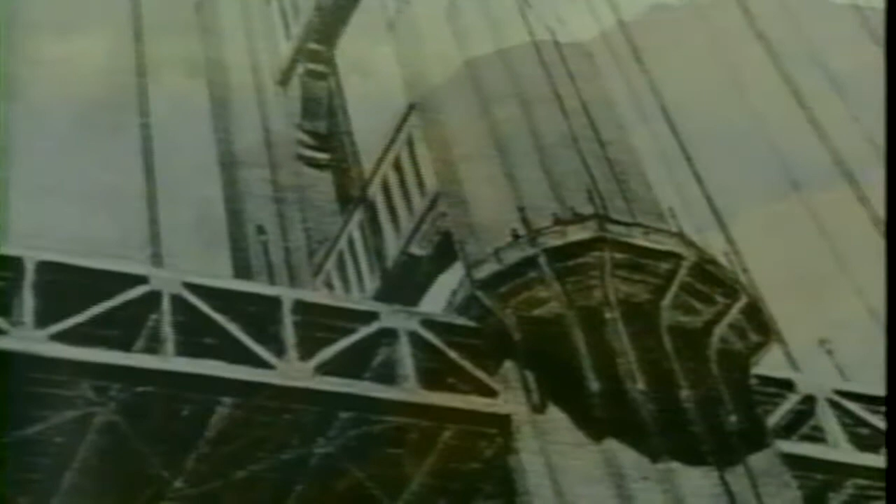There was opposition to a bridge, of course. Generations of Californians had come to love the beauty of the Golden Gate, and there were many who saw in a bridge across it the end of that beauty. That is one reason any bridge there had to be spectacular. The engineers who designed it knew they could do no less.

And to make the pressure even greater, there was a historic site, the Civil War-era Fort Point, smack in the way of the bridge on the San Francisco side. Joseph Strauss would have to build around it. Today, the juxtaposition of the little fort and the great structure remains one of the bridge's most appealing features.

One of Strauss's great skills was appointing the best men for the engineering job he was overseeing. It would be said later that credit for the unbelievably sophisticated engineering involved belonged to his assistant, Charles Ellis, whom he fought with and fired before the actual construction work began, and also to his partner, Clifford Paine. But it is Strauss who was unquestionably in charge of the operation and who is celebrated today as the bridge's master builder.

Strauss first proposed a combination suspension and cantilever bridge. At the time, 1921, a pure suspension bridge with a center span of over 4,000 feet seemed impossible. But many San Franciscans had the same reaction: this was a truly ugly structure.

Fortunately, in the next 10 years, it was determined a suspension bridge with a more than 4,000-foot center span was possible, and was what Strauss then proposed. But this bridge would have to include major advances over any built before.

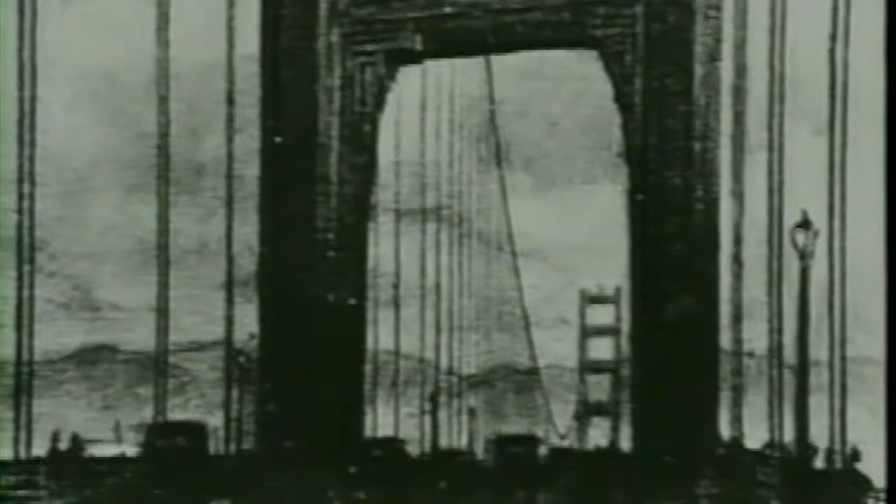And this would all have to be done in a day when structures were still built largely by hand. Well, I think just envision, if you can, building a structure of this magnitude with hand labor.

We didn't have, as we know today, all of the construction equipment that we normally build major projects out of. You actually wheelbarrowed cement out, and you actually walked out with building materials. And you literally hand-built cranes in place to do some of the heavy lifting.

Getting the bridge underway took years, in part because it was going to be paid for not by the federal government or the state, but by private money, bonds guaranteed by local taxes. Remarkably, in 1930, with a depression underway, the citizens of San Francisco and six northern counties agreed to the plan. The people went to the polls, and they voted to put up their homes, their farms, their agricultural lands, their commercial properties as a guarantee against a bond issue. Should ever there be a default on the bonds, they would pay it out of the property tax.

I doubt many of us would put our houses in hock for a project that many people said would fall into the bay anyway. And today, the bridge stands as one of the very few monumental feats of American engineering, paid for without any state or federal funds. Of course, nothing about San Francisco had ever been ordinary.

It had survived a devastating earthquake in 1906 and was now one of America's great cities. But as in so much of this country, the Depression of the 1930s brought despair to this otherwise spirited place.

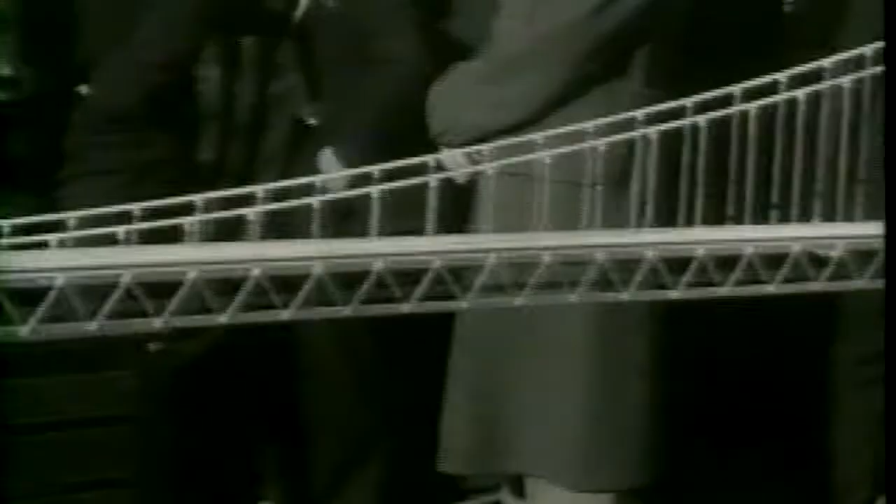And we never did. So part of the bridge's appeal was the work it promised, maybe even massive amounts of it, and the bridge itself would be undeniably beautiful.

It's just incredible when you think of it. There are just two towers holding up what is not unlike a clothesline, anchored at each end, and the bridge itself is hung from that line. It's a very light-looking design. It's a very graceful design.

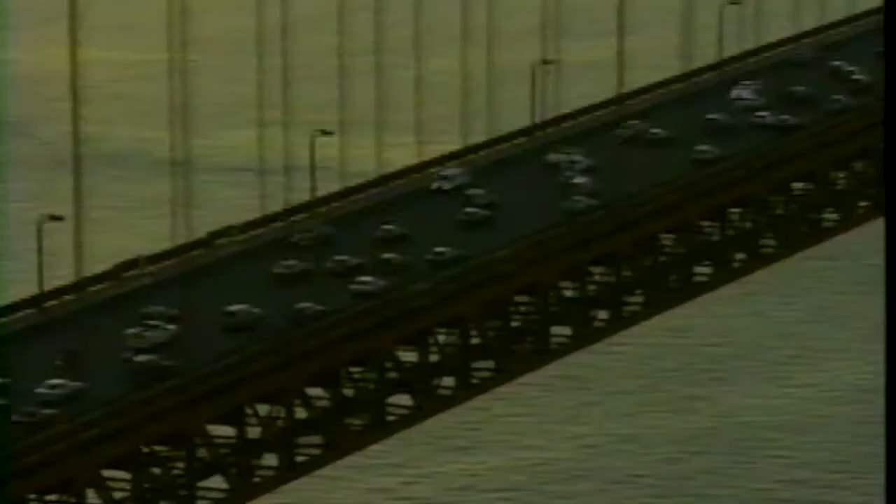In a suspension bridge, a roadway is suspended from cables anchored at each end and draped over two towers that support both the cables and the load they will hold up. The natural sag of a cable strong enough to hold the load over the distance determines its shape. But the elegance of a suspension bridge is that the nearly vertical run of the cables on either side of the tower allows the towers to shoulder the load directly.

The construction of the Golden Gate would be divided basically into five parts: the anchorages to hold the ends of the cables, the piers to support the towers to hold up the cables, the two cables to support the roadway, and finally, the roadway itself.

The assembled multitudes greet the famous 30th Regiment United States. And after all the talk and all the politics, the big project got underway, as such projects do, with a ceremony of turning over a spadeful of earth. Mayor Rossi begins the actual groundbreaking ceremonies by turning the first shovelful of earth. Construction of the bridge had begun.

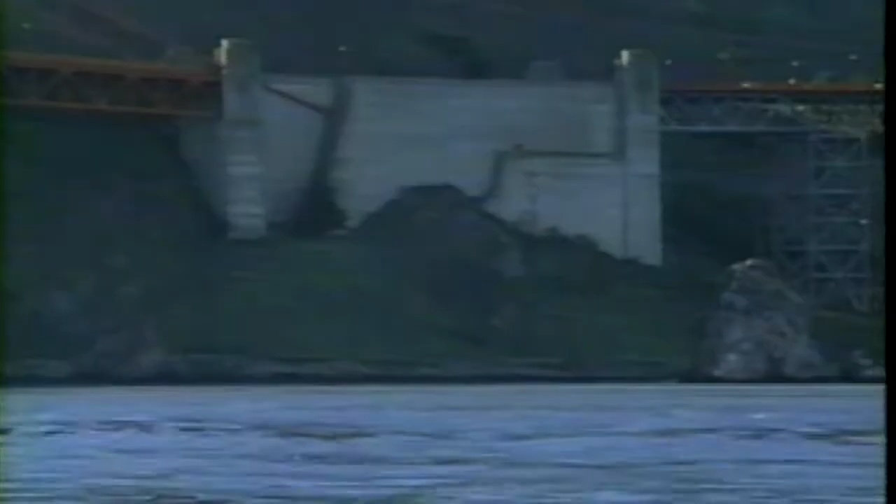Of the anchorages, the massive concrete housings sunk deep in the ground that would hold the two mighty cables.

Because hundreds of thousands of tons of concrete would be needed for the bridge anchorages and for the piers beneath the towers, cement mixing plants were built on each shore. A very special concrete was mixed here, made from the millions of ages-old oyster shells found at the bottom of San Francisco Bay. Excavation for the anchorages began in January of 1933 with explosives and power shovels cutting deep into the rock.

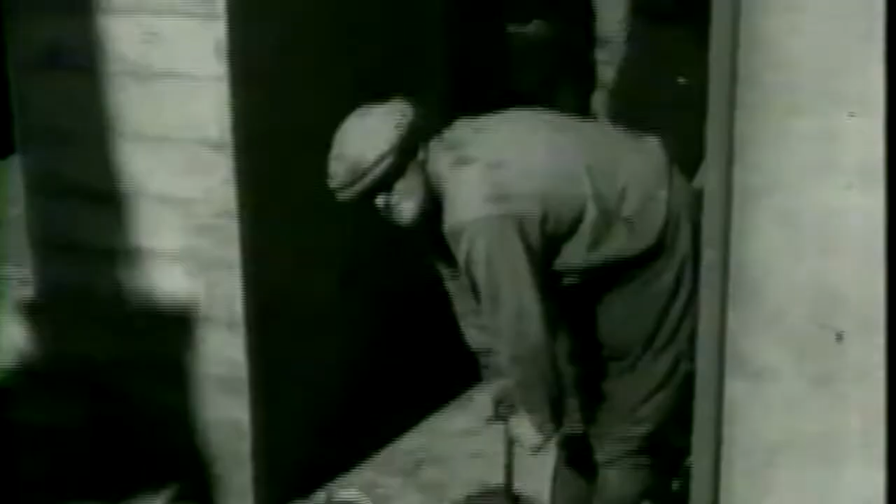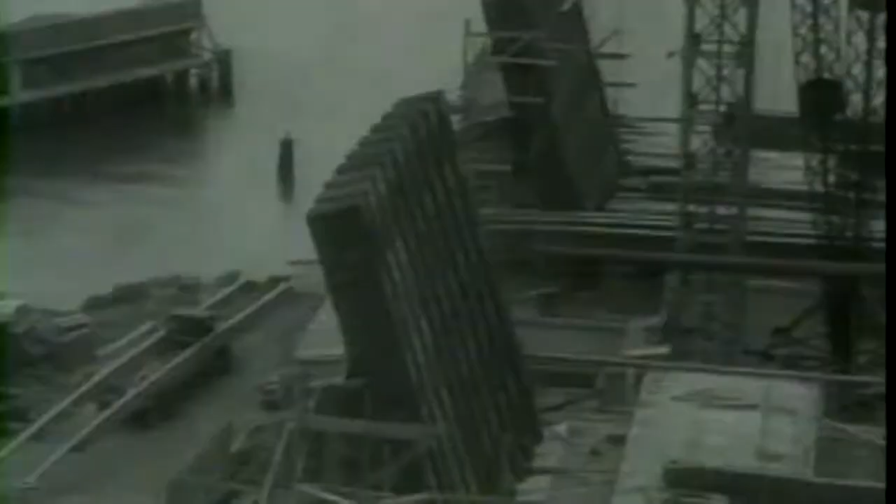A maze of wooden scaffolding grows to hold the forms for the incoming concrete. Huge base blocks are built first. At their rear are upright steel anchor chain girders. The steel links, called eyebars, that will hold the individual strands of the big cables will be attached to these. When the eyebars are in place, the anchor block is poured, burying them up to their necks.

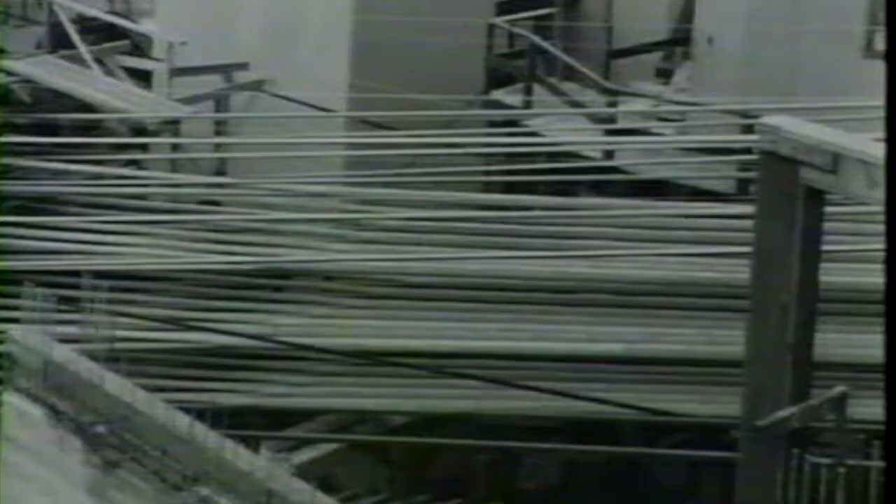The reason there are so many is a key element in the bridge's construction. Although each of the two main bridge cables seems like a single piece, it is actually made up of 61 strands of wire, and each strand contains hundreds of pencil-thin wires bundled together. At the anchorage site, each main cable will be divided back up into its 61 parts to spread the load, and it is these 61 huge steel anchors that will hold them.

Finally, above the anchor block is added a weight block to add more downward pressure.

At its completion, each anchorage can easily hold the 63 million pounds of pull of the cable, the equal of 1,000 steam locomotives. And now the focus shifts to the mighty piers that will soon hold the bridge's giant and distinctive towers.

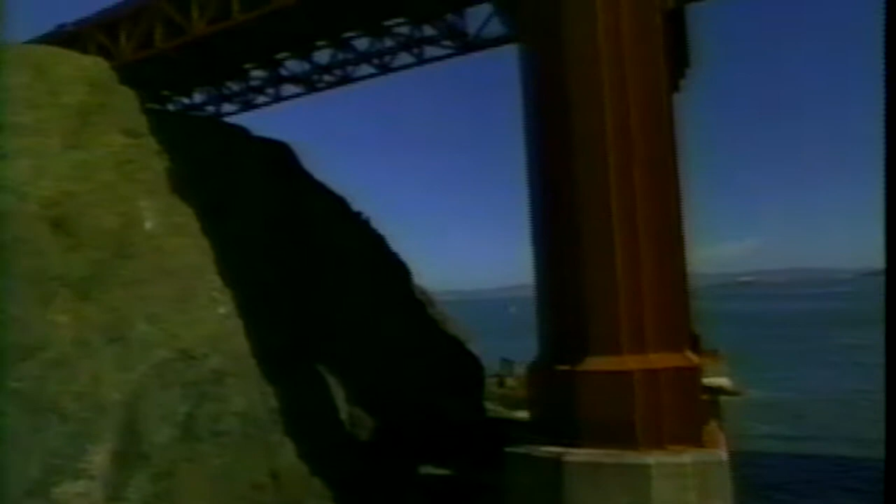As complicated as building the Golden Gate Bridge would be, the engineers lucked out in at least one area. The northern pier that would hold the tower on the Marin side could be built on solid rock extending out from the Marin cliffs. That bedrock is 20 feet beneath the waterline. But building a pier at the site was still a relatively easy job.

So that the actual pier supporting the tower could be built on dry land, it was decided that a three-sided dam called a coffer dam would first be fitted snug against the rock. This would later be emptied of water and the tower pier built in dry conditions inside it.

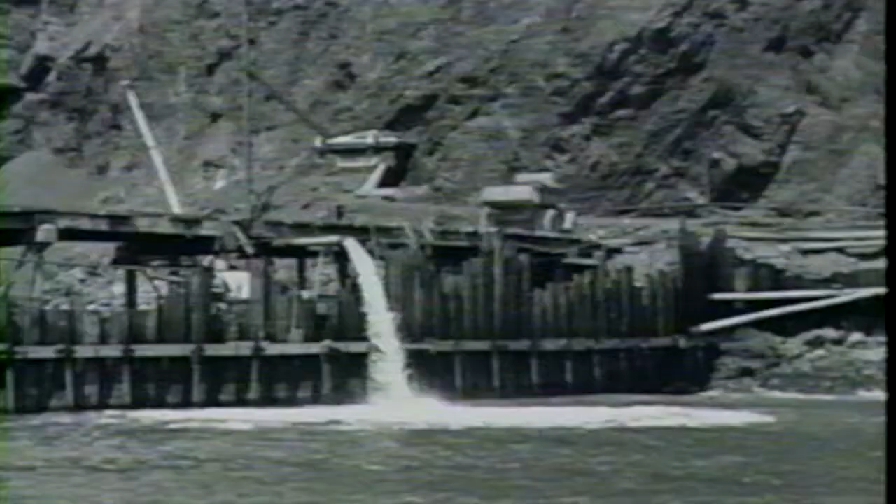The coffer dam has sheet steel plates on its outside edges. To make them watertight, their seams are caulked at first with sacks of wheat. Later, red dirt from the surrounding hillsides will be used. Now the three-sided dam and the side of the cliff form a perfect huge box.

Water is pumped from the inside, giving the workmen a field day as they collect the suddenly surprised and very dry fish. And after the rock bed is prepared, successive layers of concrete form the pier itself. Before long, a 65-foot-high monolith stands ready to receive its tower.

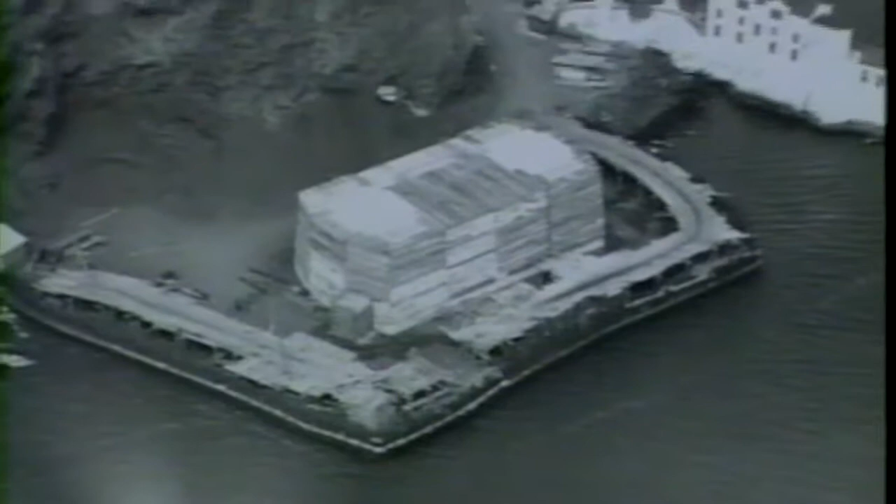The great challenge of the Golden Gate Bridge was the South Pier. This would hold up the tower on the San Francisco side, and the basic pier construction would match what had just been fairly easily accomplished on the Marin side.

The problem was, this pier was going to have to be plunked down square in the channel, where the tremendous tides and currents and winds made it difficult just to be out there, much less build a structure 60 feet down. And access wasn't the only problem. The seabed on which the pier would sit was not flat, but sloped from 60 to 80 feet below water level.

The first work on the South Pier began in early 1933, with a long trestle to provide access to the site, since it was clear the seas were far too rough to work from stationary barges. It takes brave men to work from the barges when they have to be used. They rise and fall like a bucking bronco.

Which is not to say the trestle plan doesn't have its own drawbacks. Within months, the trestle is rammed by a very off-course freighter and destroyed, then carefully rebuilt, then destroyed again by a furious storm two months later.

It looked there for a while like the conditions weren't going to let this pier be built. I mean, as soon as they got ready to go, something else would happen. It was almost like there were dues to pay, before nature would say, okay, go for it.

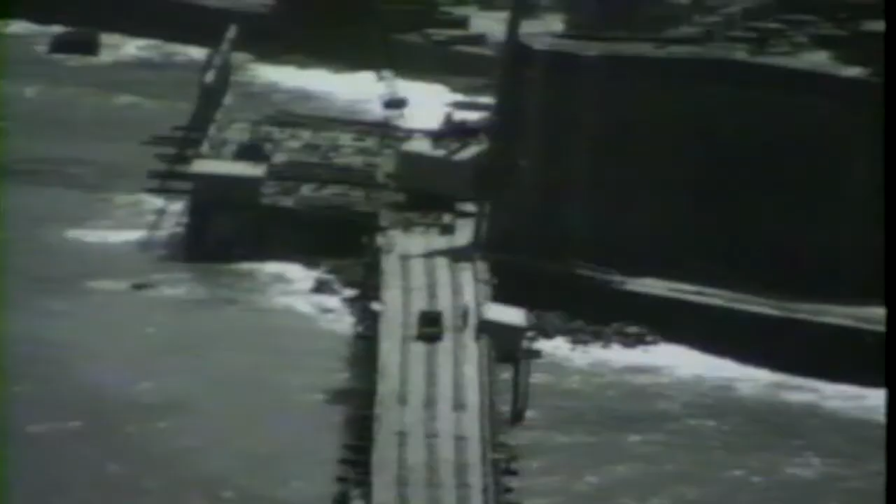But the engineers of the Golden Gate are nothing if not adaptable, so they then build a brand new and much stronger trestle. At its end, the plan is to construct a permanent fender of concrete to protect the pier on which the tower will sit.

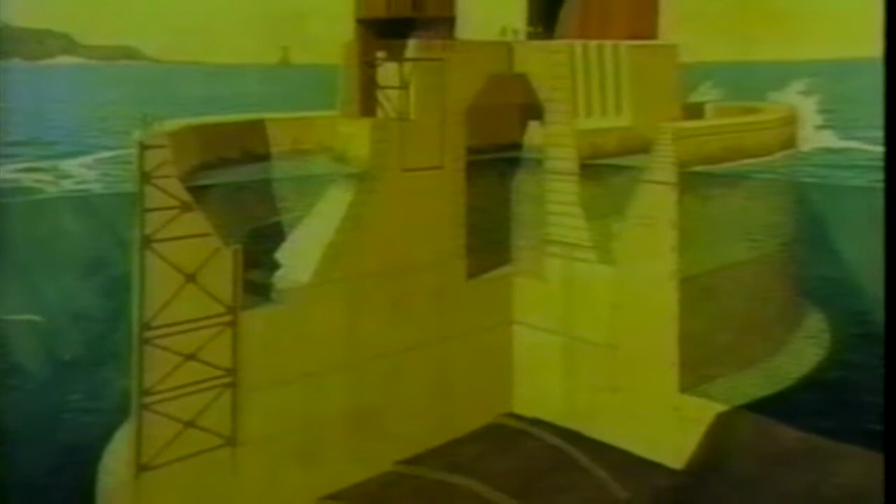While the trestle is being constructed, excavation of the seabed on which the pier will sit is carried on. This is brilliant but very dangerous explosives work.

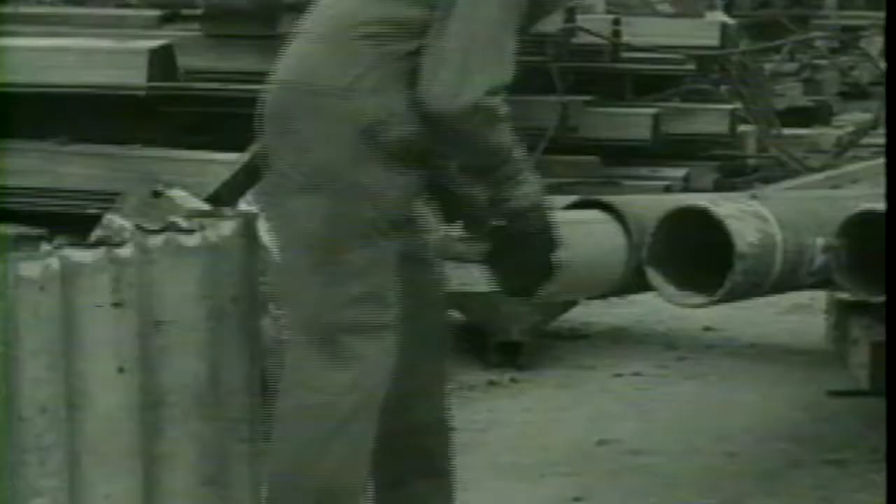First, drill bits are dropped down tubes to make indentations in the solid bedrock. Then small bombs are dropped to expand the pilot holes. It takes about 15 of these to do the job. Then, larger bombs are placed into the expanded holes.

When a group of the bombs are in place, the deep-sea divers in full Jules Verne regalia attach the wires to them. Then, from the barge Ajax at the surface, the bombs are detonated, with a huge explosion that appears as little more than a big ripple on the surface. And then the debris is removed and the whole process starts again.

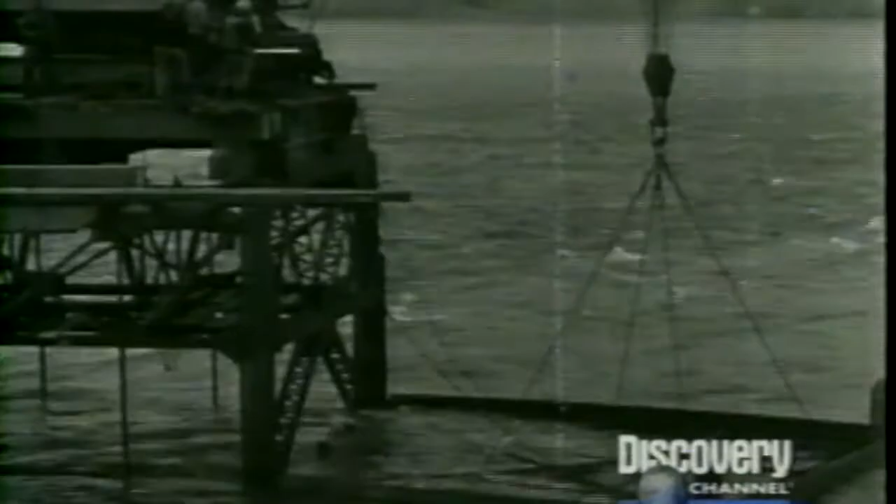When the seabed is blasted flat, the building of the fender begins. The fender walls themselves are now built up in an elliptical formation. Concrete forms are lowered into place. The concrete is poured, and the fender grows outward from the trestle.

The plan at this point is to sink a caisson at the pier site within the fender. This will become the pier's base. Caissons had been the standard way of working on the sea bottom since the days of the Brooklyn Bridge back in the 1880s. The caisson, essentially a large open-bottomed box, would be towed to the site and sunk to the bottom. Now, compressed air would keep out the water, and the men could then work inside on preparing the sea floor.

Caisson work was awful and very frequently deadly. The sand hogs, as the men were called, had to pass through an elaborate airlock so that their bodies could adjust to the different pressure at the surface and below. When the process failed, men died. When work on the seafloor was finished, the men would vacate the caisson, and it would be filled with concrete to become the permanent base of the pier.

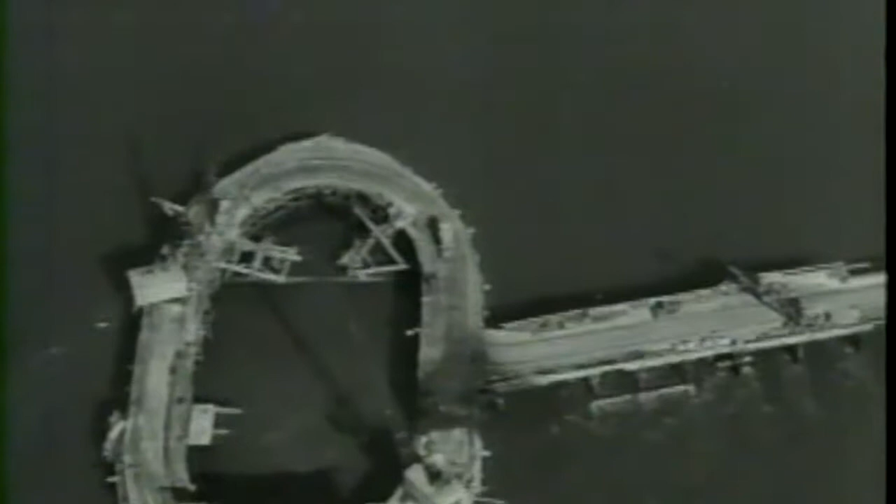On the 8th of October, 1934, the steel caisson is brought into the fender. But soon a huge storm blows up, and the caisson starts banging around like a Brahma bull at the rodeo, knocking all hell out of the fender. Joseph Strauss makes a major decision. He will forego the caisson altogether, tow it out of there, enclose the fender, and then, as at the Marin Pier, remove the water and simply work inside in the dry.

Now the inside of the fender, still underwater, is filled to 65 feet from the bottom with concrete before the dewatering takes place. Inside the giant fender, the pier grows quickly until the 5-inch thick steel plates on which the tower will sit are put in place, attached to the steelwork buried deep in the pier's concrete.

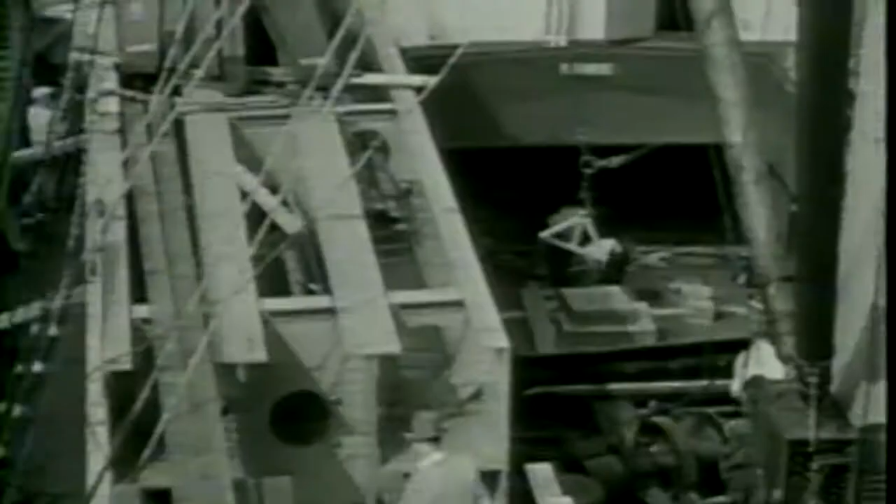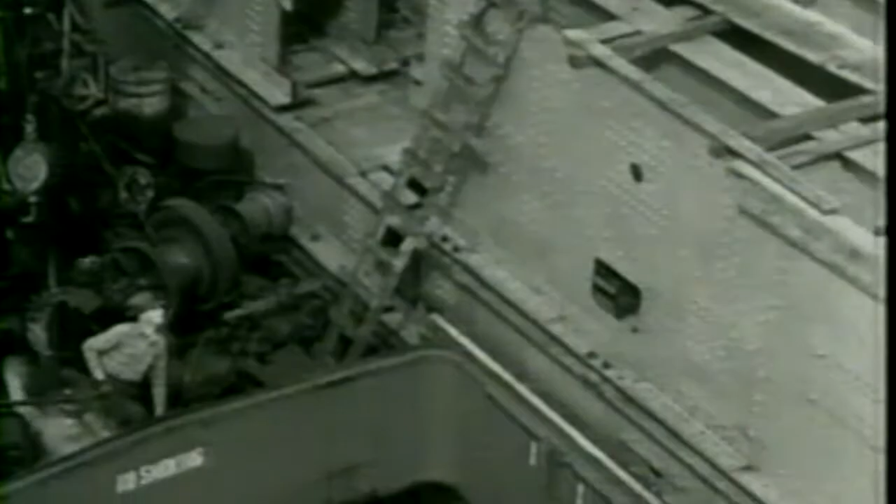Throughout the drama of the South Pier's construction, tower work has been going on the Marin side. Soon, the skeleton of the Great Bridge will rise above San Francisco Bay. The focal points of the bridge are its great towers, and work began on the Marin side tower in the fall of 1933.

Bethlehem Steel of Pennsylvania is given the job of making the steel for the towers. It is a mammoth job that has to be done with exquisite precision. Every rivet hole in the thousands of pieces in the 44,000-ton towers must match up perfectly 3,000 miles away at the building site. The whole thing has to fit together like a giant erector set. It takes miles of railroad cars to carry the steel for the towers and suspended spans.

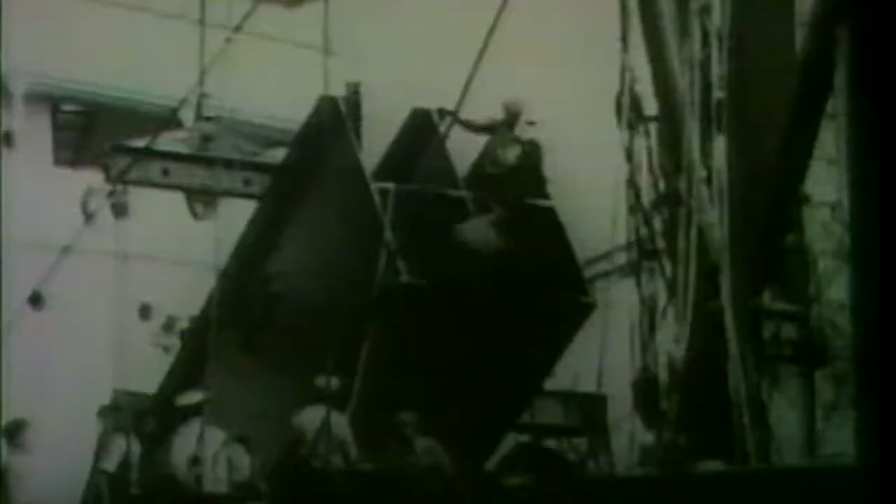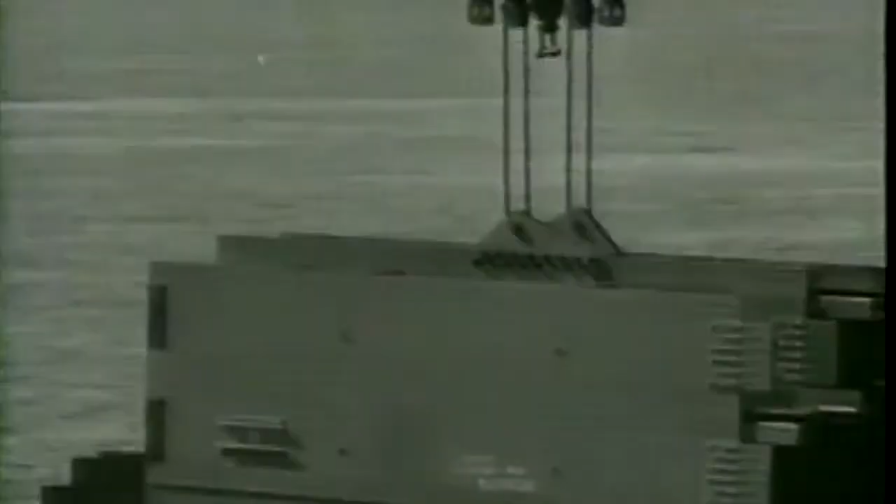As large as the towers are, the pieces must be manageable enough in size to ship them to the Atlantic coastline and then by Bethlehem's own ships through the Panama Canal to San Francisco Bay. And they must be small enough to be handled by the men who will assemble them, because again, this is still very much an era of hand labor.

The goal in the towers is to make them enormously strong, of course, but also light enough for the piers to support them. They must also be flexible enough to provide give in the tremendous winds of the gate and to adjust to the varying loads the roadway will have to support. When finished, the towers will be able to bend inward and outward more than 1.5 feet.

To do all this, the towers are constructed with hollow cells like a beehive. Men can enter each cell through tiny doorways and manholes to rivet from inside. But they also can and do get lost in the dark and claustrophobic chambers, sometimes for hours at a time.

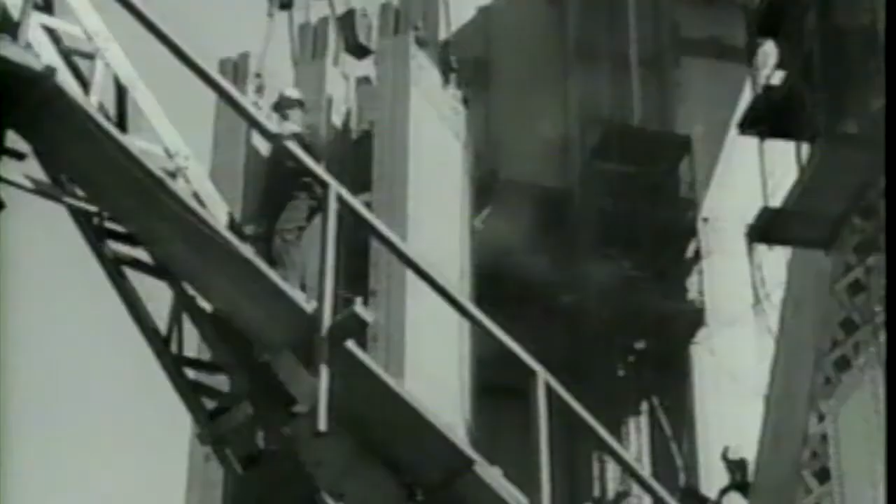It's terribly dark, all dark in there. No daylight, no nothing, you know. I got lost one time in there myself. That's the only time I got scared a little bit.

Conditions outside the towers are no better. When the workers built this bridge, they talk about the cold in ways that they may not talk about if they were building a bridge on the east coast of the United States. The cold in this area is the kind that gets in under your sweaters. There's no garment that seems to be able to keep it away from you because it's wet. It's wet cold, and it just sits there.

Oh, the gate, that was the coldest place I think I ever worked. You worked like everything to keep warm, and you'd put on all the clothes you had. I mean, there you felt it bad.

And in these conditions, death is always just one misstep away. Well, you knew if you messed up, you probably wouldn't live long, or one of your buddies wouldn't, and you didn't want that hanging on you, so you thought about it, and was careful.

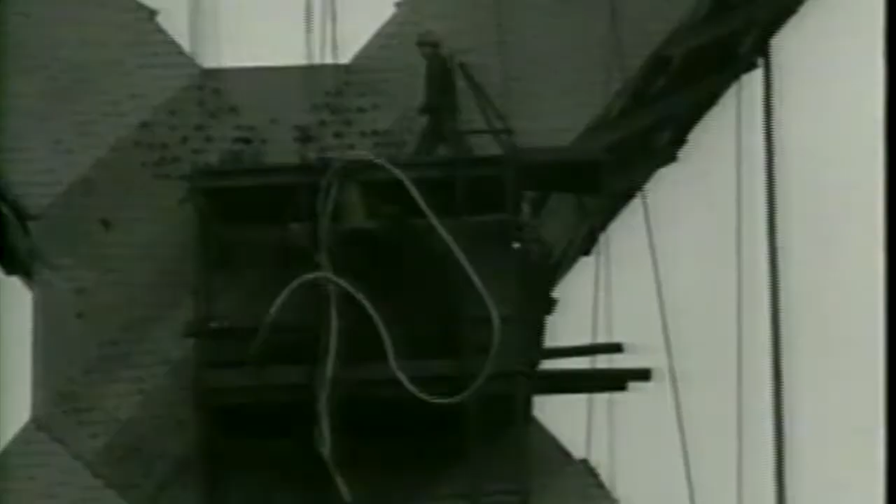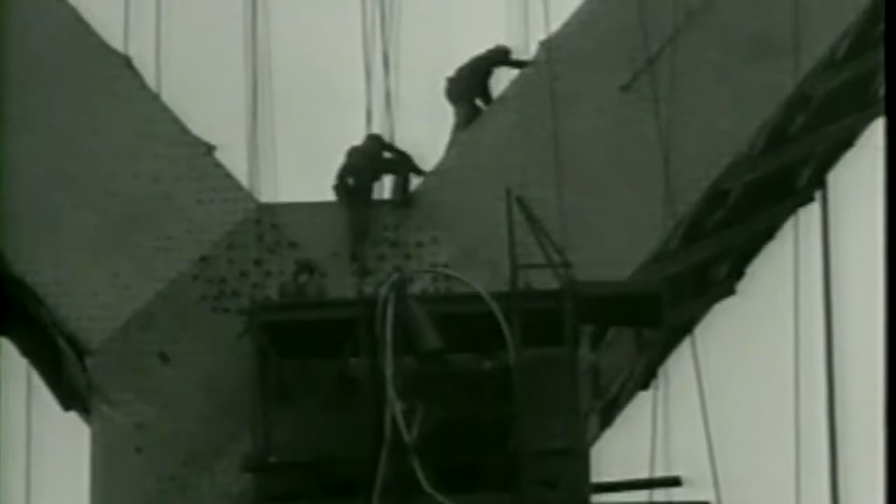Who are the bridge workers, these men who risk their lives every day? They were adventurers, mostly. It's not a job that everybody would take to. Working at heights when the wind is blowing takes a tremendous amount of agility and confidence and a certain amount of daringness. Rough, toughest guys in the world. Fight all the time. Fight each other. Roll each other.

I don't know, your heart beats faster. You're a different guy up there. Well, they were kind of guys I've never met before. They were sort of a closely knit clan that all knew one another from previous jobs. They'd done bridges all over the world, and a lot of what they did seemed very scary to me.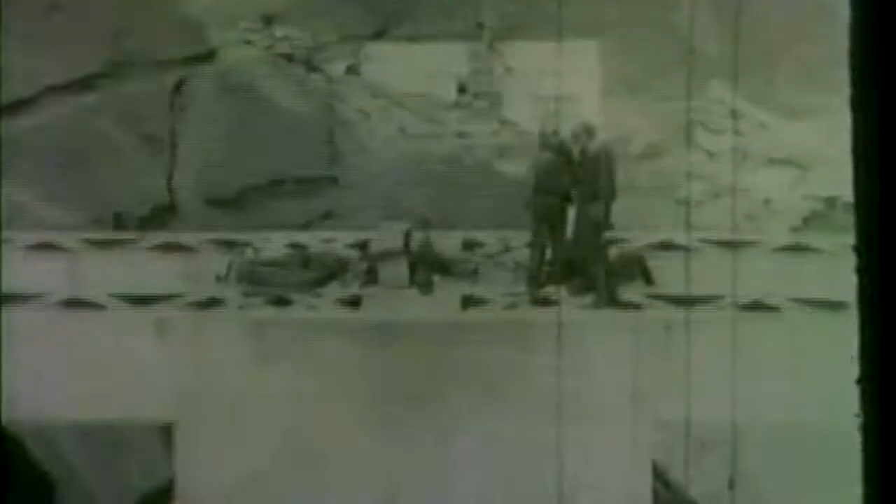In spite of any dangers, slowly the towers ascend. As the year 1933 unfolds, the Marin Tower climbs toward the roadway level.

Even in this early stage, there appears the beauty of line that will make the Golden Gate Bridge famous. Because it is obviously impossible to plant cranes in the seabed or mount them on barges in the turbulent sea, a unique method of self-lifting cranes is devised. As each section of tower is completed, the giant cranes lift themselves to a higher level to start the next section. One red-hot rivet coming up, special delivery to men working by the light of miners' lamps inside the tower.

Things move swiftly, but a safety problem arises early in tower construction. A lot of riveters were coming down with otherwise unexplained ailments. At one point, they had 60 people in the infirmary diagnosed with appendicitis. Hair was falling out and nausea. And they finally realized that when the steel was coming west from Bethlehem, it had been treated with red lead paint in such a way that the rivet holes had a membrane of paint covering it. And when those rivets hit the red lead, it was creating a fume.

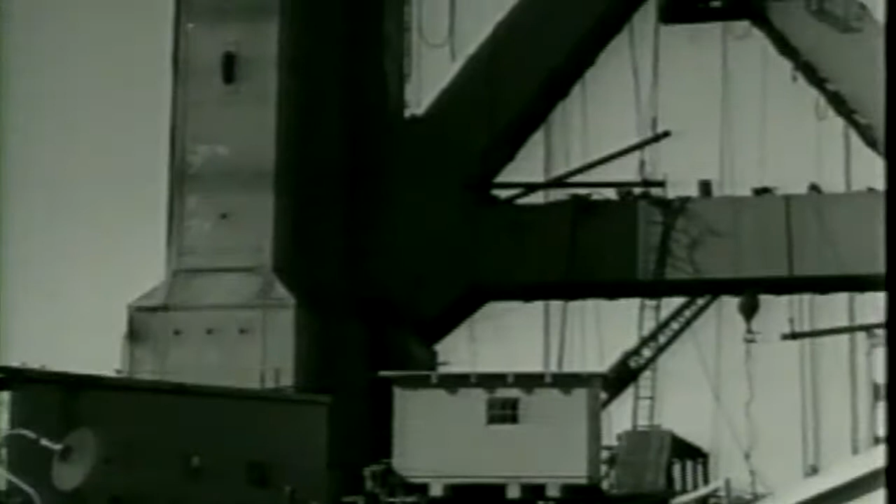The problem is solved by sending air into the closed tower cells and by supplying the men with filtration masks, though many refuse to wear them. Later on, the steel will be protected by iron oxide instead of the red lead during its manufacture.

The work on the bridge is clearly tough and dangerous, but the Depression has changed the whole equation of labor and management. The bridge was undertaken in part because it promised jobs in these terrible times, but it can never hope to make more than a dent in the unemployment problem. And every day at the bridge site, those leaving work can see armies of desperate men looking for work on the bridge.

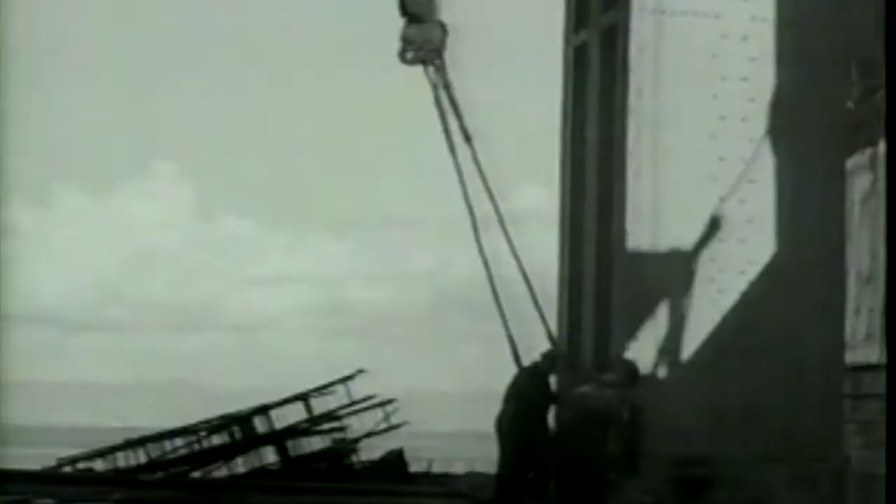I was up there, 150 guys down the bottom of the tower waiting for us to fall off or quit so they can get the job. They come from all over the United States here. It makes you a little nervous, you know, because I know what he's down there for. Hell, they get these 5-gallon tins, they were cooking beans and bacon butts. You could smell that stuff coming up there. They had fires there all day long. 4 o'clock, they'd leave. In the morning, they were there to get ahead of us.

This ready supply of labor emboldens the contractors to push their men to work harder and faster. Speed increases profits. And the expression they had those days was 8 for 8 or out the gate, meaning you put in 8 hours for your 8 hours of pay, you put in 8 hours of work according to your supervisor's satisfaction, or he would look over to this fence at all the people who were waiting for jobs who didn't have them. He'd fire you and get one of them.

At that time, they would say, you moved or else you didn't stay. Many a time I see a foreman come out there at 9 o'clock to see a guy, you know, he wasn't doing it like he should do, and go get you a check.

The Marin side Tower goes up first, but both towers are finished by the middle of 1935. Now, the Bay Area can get a good look at what it has agreed to, for it is the towers that define the look of the entire structure. And few cannot be impressed.

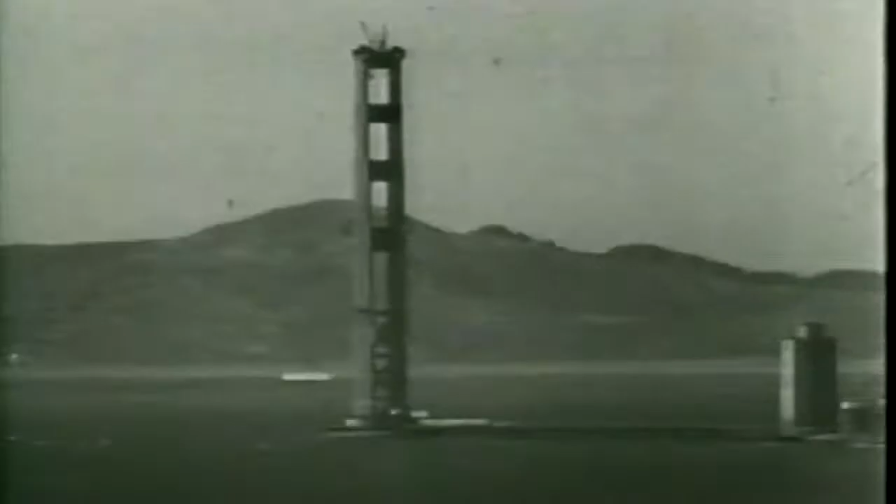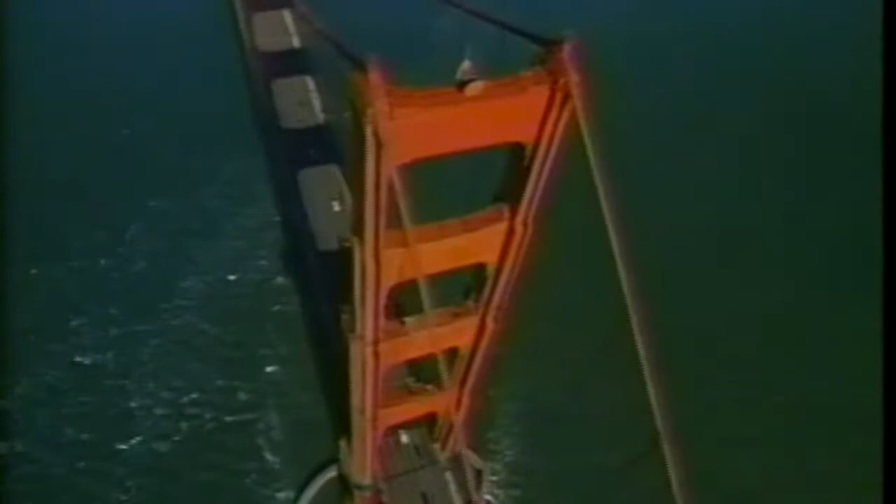Pulling from the best of the Art Deco design of the period, the engineers and architects have built two simple and majestic forms. As their subtle geometric lines play with the ever-changing light, the bridge itself constantly changes its appearance. The horizontal plates that cover the structural steel above the roadway turn the towers into giant, inviting doorways. And where it is usual to increase the size of the details in a structure as it climbs to keep them visible from ground level, the designers here do the opposite, simplifying and thinning the towers as they ascend so that they seem to reach like steeples into the sky.

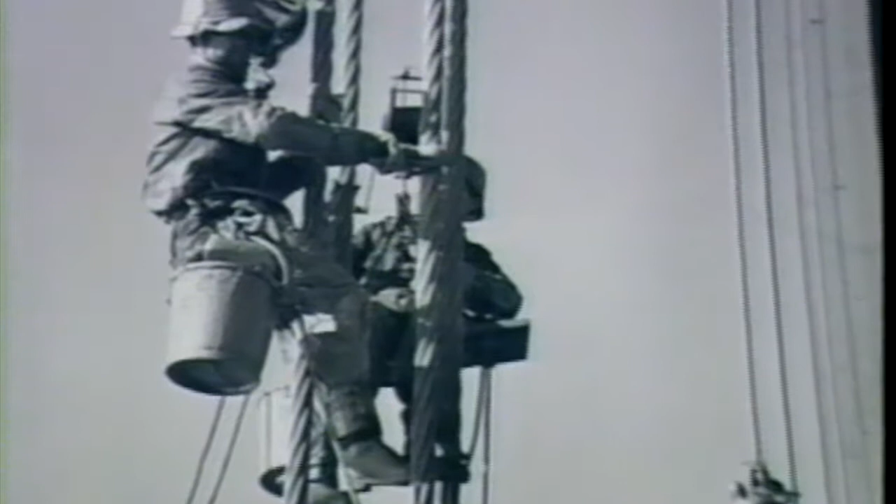During construction, the question of the bridge's final color has been hotly debated. Protecting the bridge from the elements is the key requirement. Suggestions have run to the usual black, silver, or gray. But a color called Dulux International Orange has stood up well in tests and matches closely the original protective paint, which people have come to like. It contrasts with the cool blue-grays of sea and sky, and it also matches the rust-colored earth of the Marin Hills.

Seven months before completion, the decision is made, and it will never be regretted. The towers now stand as sentinels of the Golden Gate.

Next will come the most intricate part of the job, and the part that defines a suspension bridge: the spinning of the two giant cables that will hold up the roadway. The bridge is its cabling, the two huge cables knitted from thousands of tiny wires which hold up everything, the hundreds of thousands of tons of roadway and cars and trucks and people.

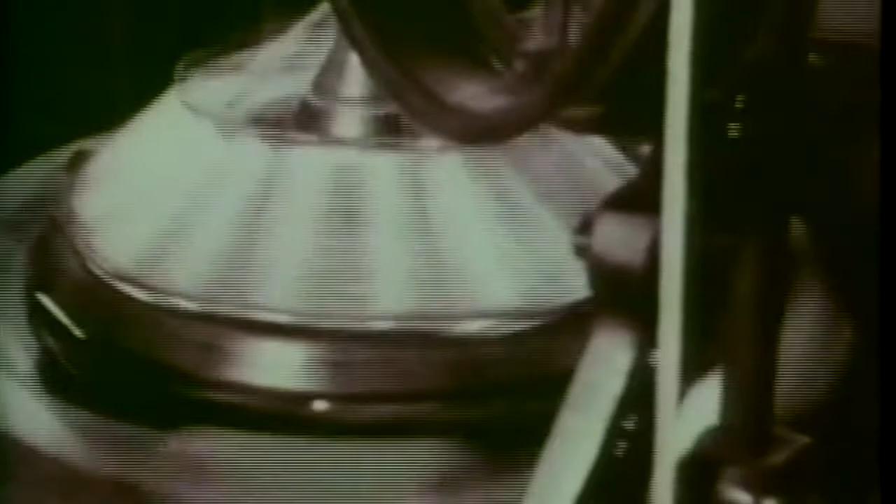It was in the spectacular achievement of the Brooklyn Bridge back in the early 1880s that the engineers John and his son Washington Roebling had made their reputation. Here, wire made from steel was used in the cables for the first time. It is their wire steel firm, the Roebling Company, that has been hired to do the enormously sophisticated cabling work on the Golden Gate. From their base back east, the Roebling Company has sent out the engineers and materials to do the job.

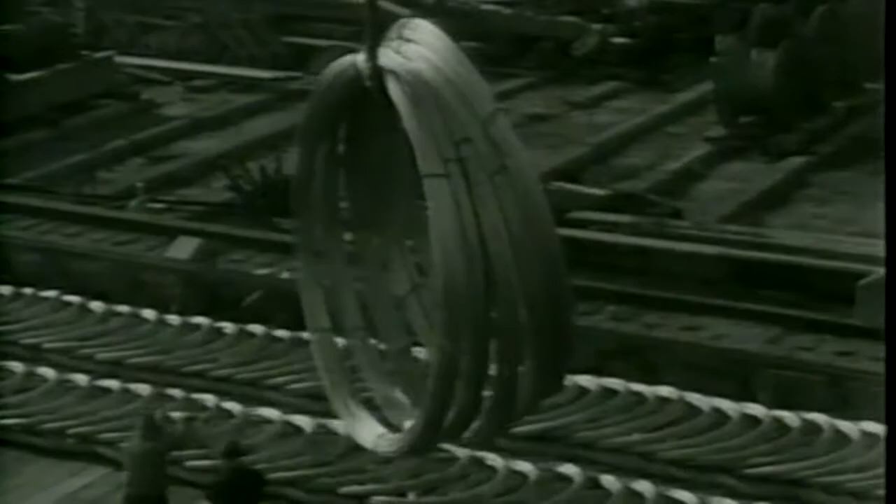The cabling process begins with the arrival from the east of the coils of the pencil-thin wire. When the bridge is completed, each of the two cables will have over 27,000 of these wires in it. But because they're attached at their ends, each cable will, in fact, contain just one wire 40,000 miles long. It could circle the Earth nearly two times.

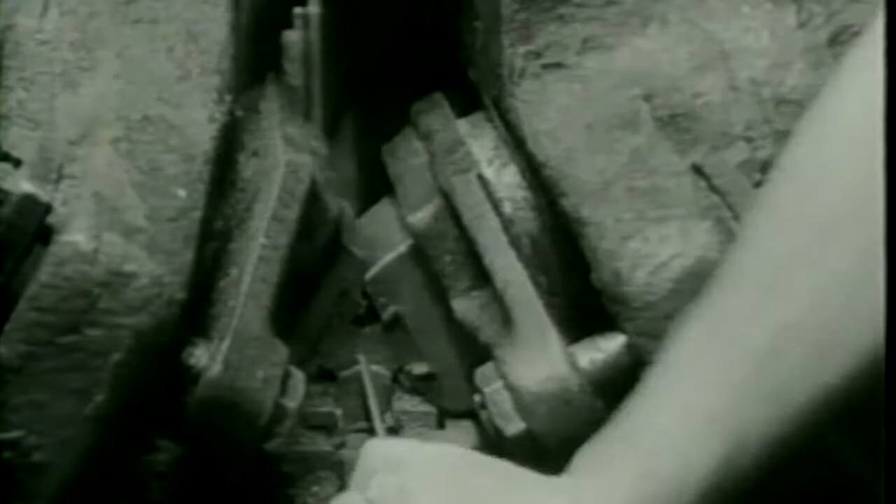The coils of wire are uncoiled and joined together at their ends into larger coils under tremendous pressure. Then the wires are cleaned of the wax that has been protecting them since manufacture.

Now, the wire on the intermediate length wheels is rolled onto the final huge spools, which will be taken to the bridge site for unreeling into the cable.

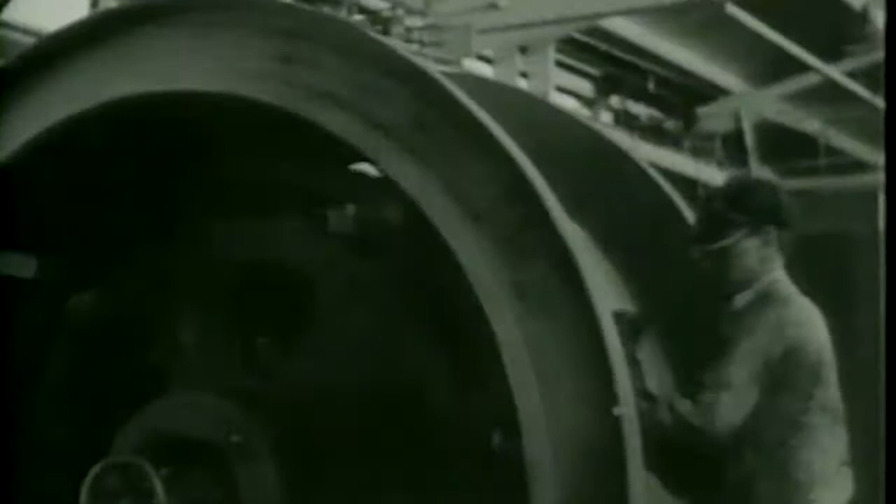Just as elaborate temporary scaffolding is necessary for workers to reach all parts of a new building, placing the two cables requires long footbridges to be first built from shore to shore so workers can reach every part of them. The footbridges are to be laid on wire ropes, and with the pulling across of the first one, the two sides of the Golden Gate will be connected for the first time in history.

The Coast Guard stops all ship traffic through the gate as these ropes are towed across and hung from the towers.

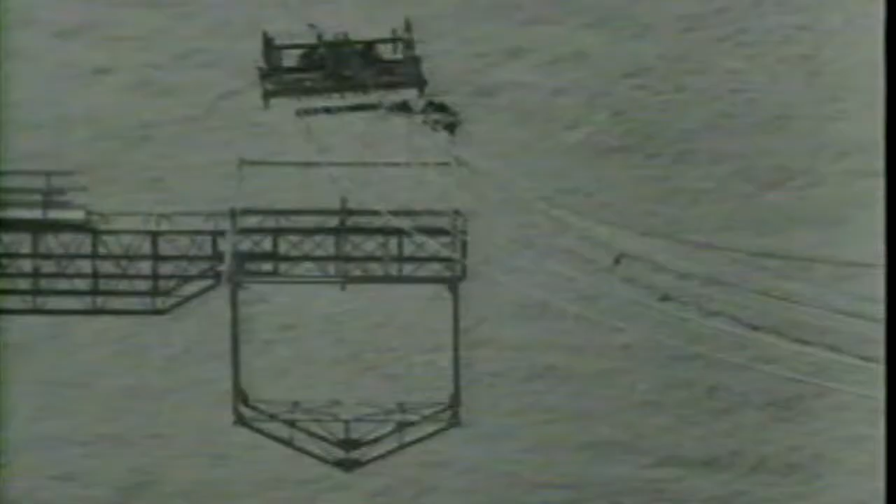The footbridges themselves are made up of 10-foot sections of redwood planks on steel. Ten of these make up what is called a train, and these are then slid down the wire ropes into position. Crosspieces help steady them and serve as bridges from one to the other.

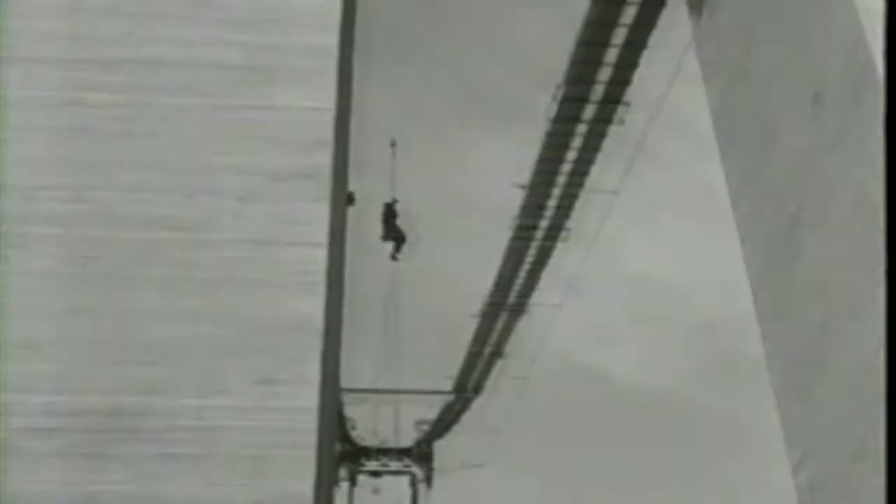When finished, the two footbridges match the arc of the yet-to-be-spun cables, and it looks almost as if the bridge is nearly finished. But the real cabling operation hasn't even begun.

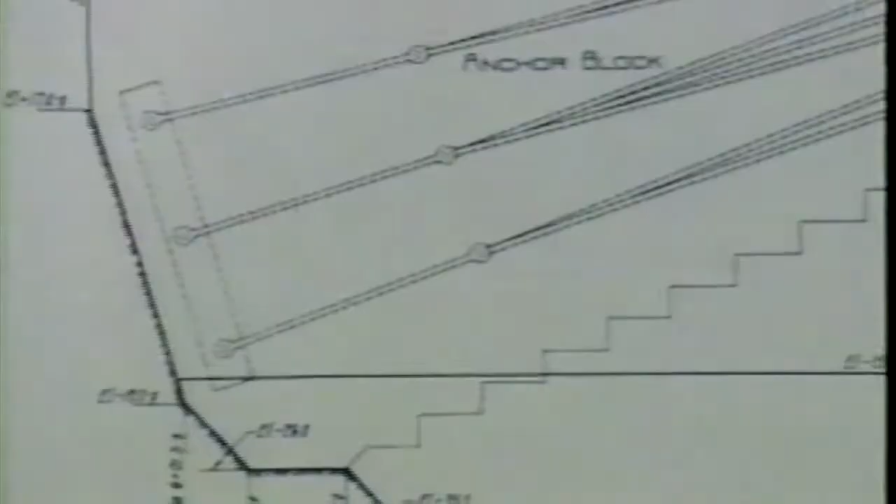What is going on, basically, in the cabling operation is the pulling of the wire from one shore to the other to build up the two cables that hold up the roadway. Hundreds of wires make up what is called a strand, and again, there are 61 strands packed into each cable.

After the beginning of each new roll has been attached to the end of the wire already in place, a loop made up of the fixed and new wire is placed around a wheel attached to what is called a tramway carriage and pulled to the other side.

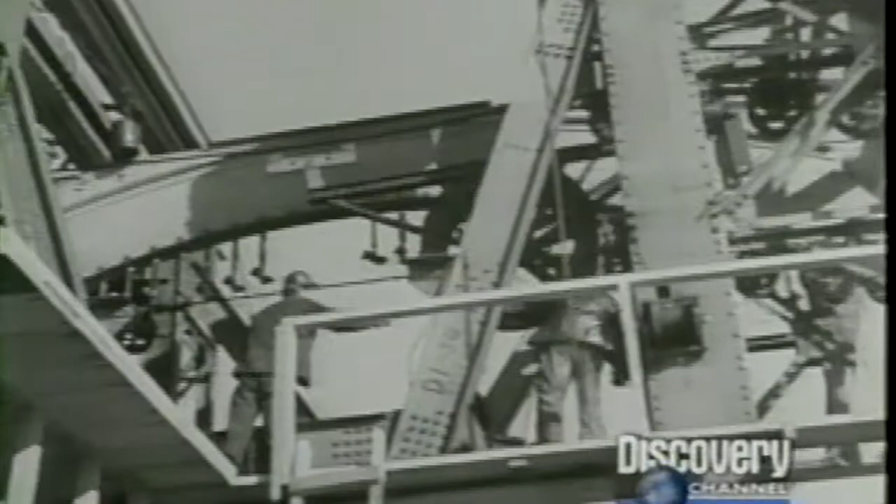At first, only two wheels are used, but in these depression times, the Roebling Company has had to submit a rock-bottom bid to get the contract for the work. And at this slow rate of cabling, they'll lose their shirt.

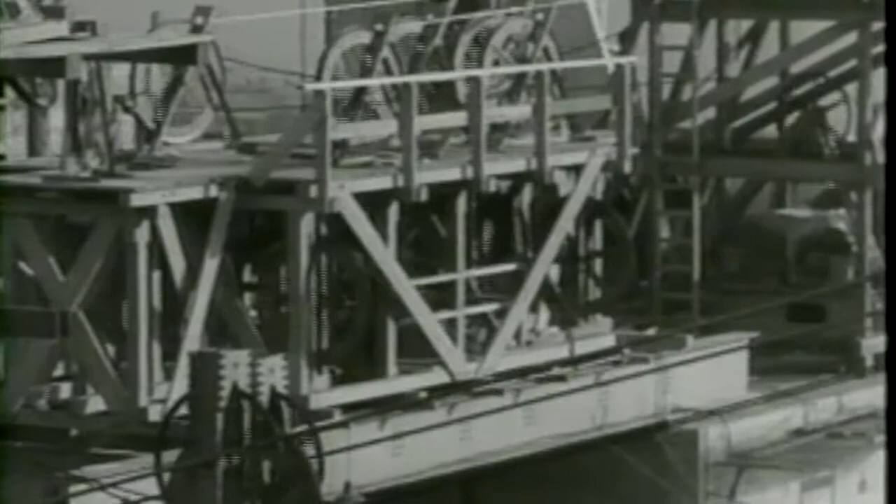Well, if two wheels work on each tramway, why not three? And before long, the bridge towers begin to look like the largest telephone poles ever built. Through a system of weights and pulleys, workers keep the tension on the unrolling wire constant.

At the opposite shore, each loop is placed around a horseshoe-shaped fixture called a strand shoe, connected to one of the eye-bars buried deep in the anchorage. Each of the 61 strands is attached to a different eye-bar to spread the force of the cable's pull.

When a strand is finished, the strand shoe is brought back into the eye-bar, and then, like so many Lilliputians out of Gulliver, workmen lock it in place with a huge pin, using nothing but their own strength.

Working high up in the sky, other men ready the wires to be placed in the saddles which carry the cables over the towers.

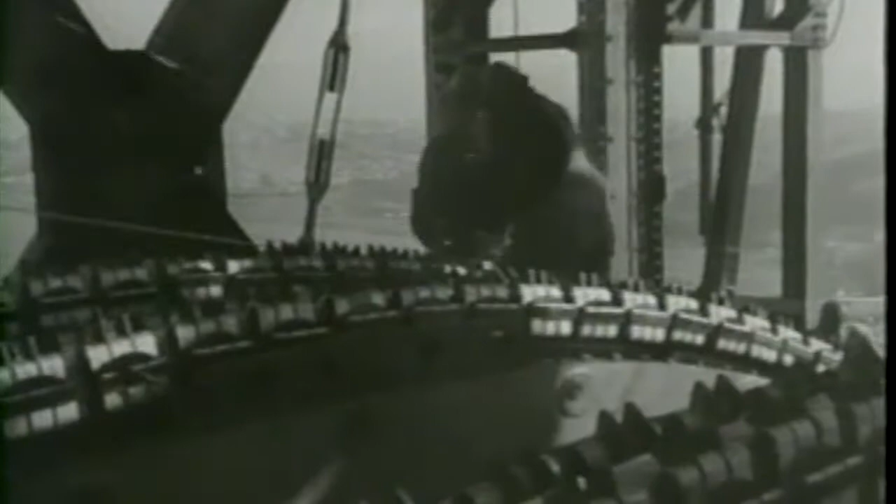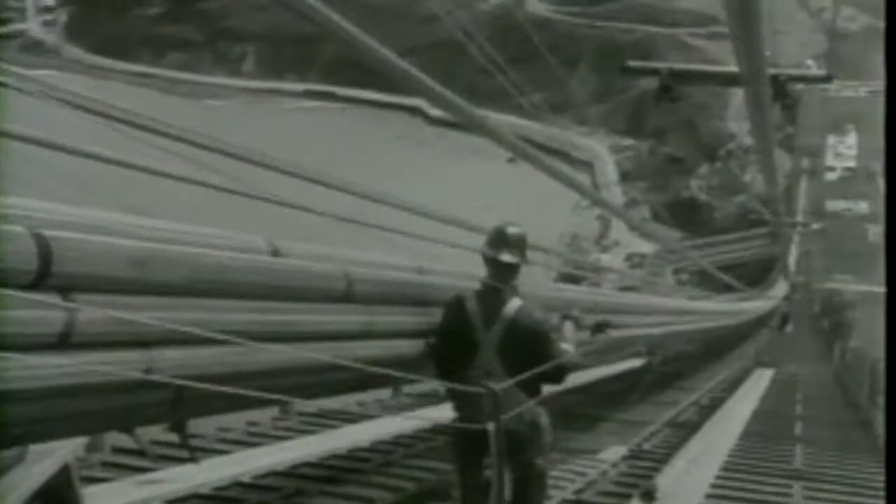At the end of the process, when all 61 strands are in place, this hexagon is compacted into a perfectly round shape by one very powerful machine.

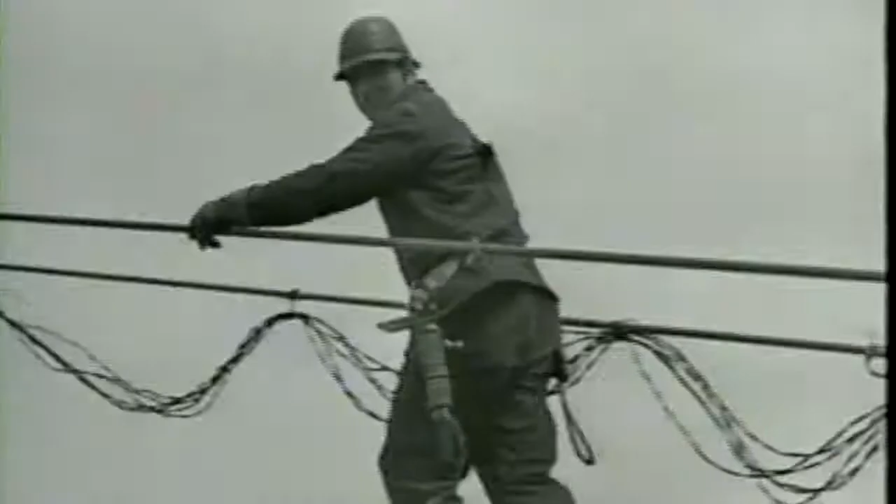The cables were spun in record time, just 6 months. The Roebling Company and its men held a party that lasted 3 days.

And now, the work on what everything done so far was designed to hold up, the roadway, was ready to begin. In building the Golden Gate, hanging the roadway from the cables comes next.

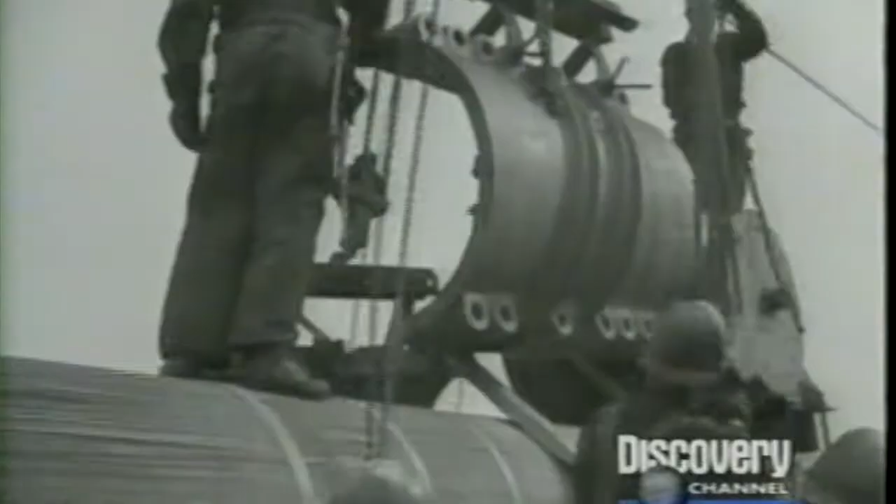To do that, cable bands are placed around the cable, and steel wire ropes, called for obvious reasons suspender ropes, are dropped around them into position.

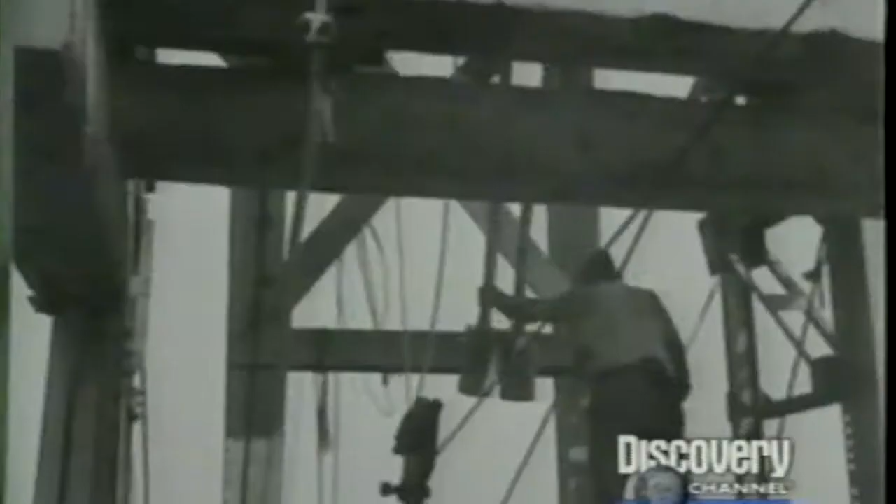The Golden Gate is, again, not a rigid structure, but a flexible one, designed so that all its parts will be held in perfect alignment. If the suspender ropes should stretch from the load of cars and trucks, the roadway would not sit at the right height. So they are pre-stressed at the factory to limit their stretch.

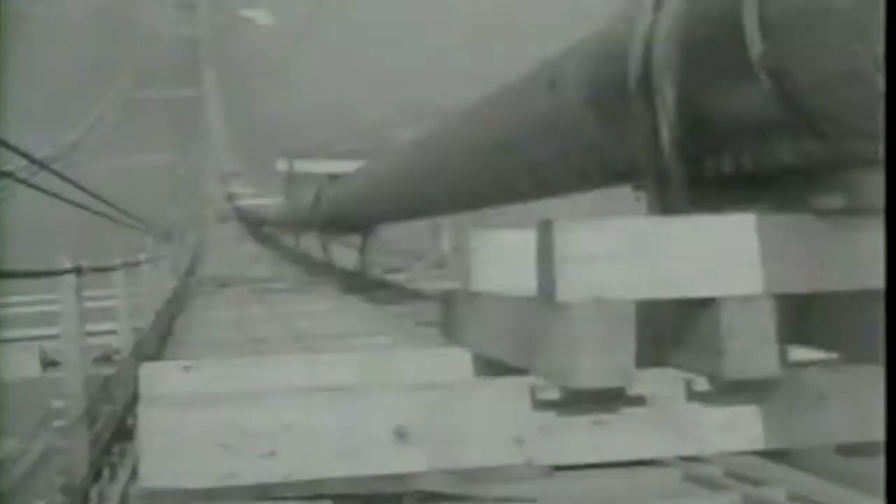Like so much else on the Golden Gate, the suspender ropes are placed as much by the power of man as by machine.

Now the roadway structure is ready to go. And now it's also time for Bethlehem Steel to get back into the game. They've custom manufactured all the pieces back east and sent them out here for placement. This work is a lot like the tower work.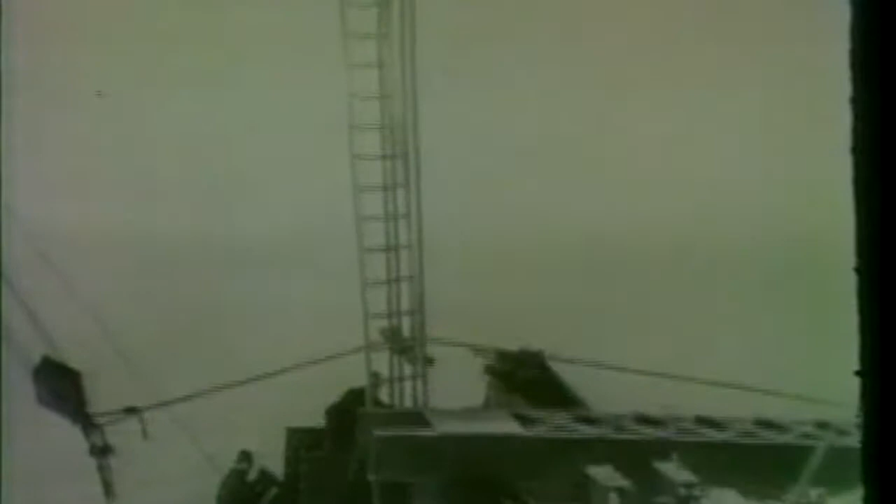Like ants, the men crawl over, under, and around the steel to rivet it in place. That means for some men, spending hours working in the dark inside box girders, hours filled with unbelievable noise, smells, and vibration. The side pieces of the roadway are called stiffening trusses.

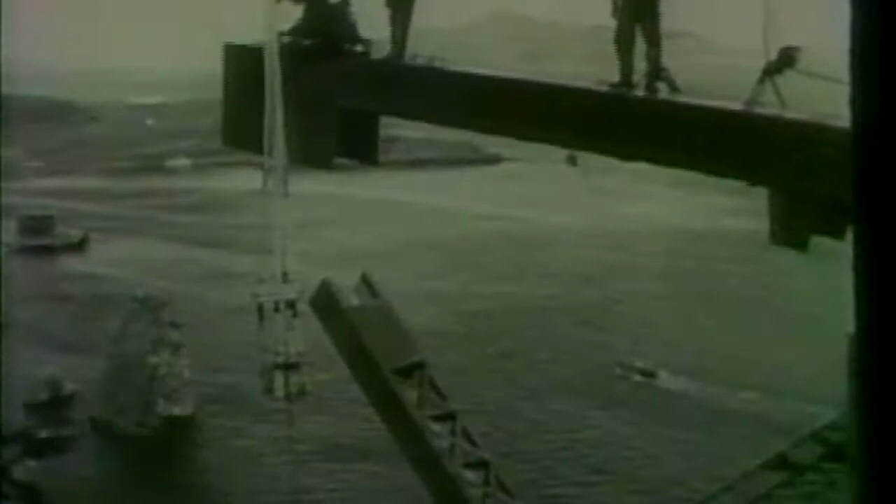They're made up of bottom and top pieces called chords and connecting verticals and diagonals. The roadway structure is a grid system made up of huge cross beams topped by long steel stringers.

On top of this will be placed a grid of reinforcing steel, and then the concrete roadway itself will be poured. With all the dangerous work on the bridge, injury and death is to be expected.

But the fact that at a time when it's assumed one man will die for every $1 million spent, only 11 men will die on this $35 million bridge is a tribute to the chief engineer and his obsession with safety. One remarkable feature of the bridge is that it was built at such speed with so few casualties.

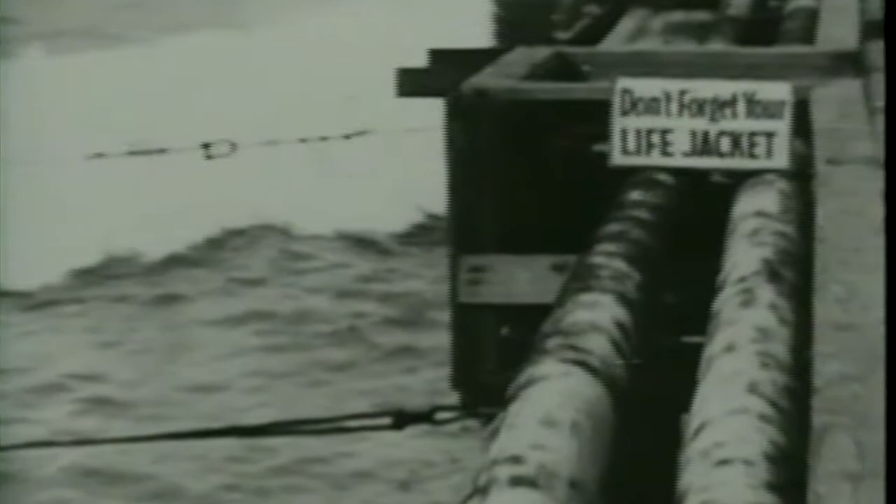And that didn't come by accident. Strauss's firm, and the record suggests it was Strauss himself, was preoccupied with the notion of safety.

Well, they were about safety. If it looked like it was dangerous, the foreman or superintendent saw that you weren't handling things right, and you were out.

The Golden Gate is the first bridge to require safety helmets. And there is a remarkable innovation here: a safety net that runs under the growing roadway.

One fella fell about 35, 40 feet, but the net caught him and he came out and wasn't hurt. That net made it a lot different there. It turned you loose and let you work free and easy.

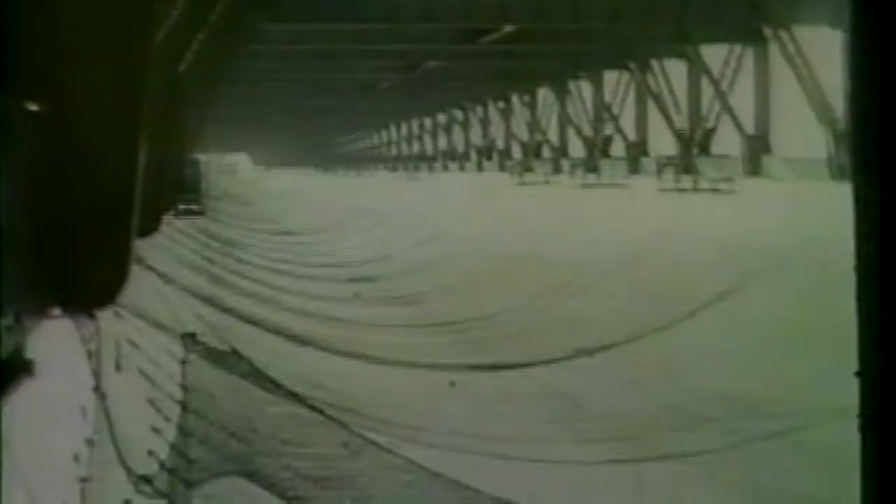The 19 men who cheated death by falling into the net instead of the bay later started what they call the Halfway to Hell Club. It was named by a man who had a particularly nasty accident.

Al Zampa, now 92 years old, worked steel on the roadway 140 feet above the channel. One day, he took a misstep and fell into the net. See, I stepped too far, hit on my heel, slipped, and quick down, hit the net.

Unfortunately, the net at that point was hanging over some rocks on the Marin side. I wasn't scared because I figured the net's going to catch me. It never did catch me. It caught me on the ground at the same time.

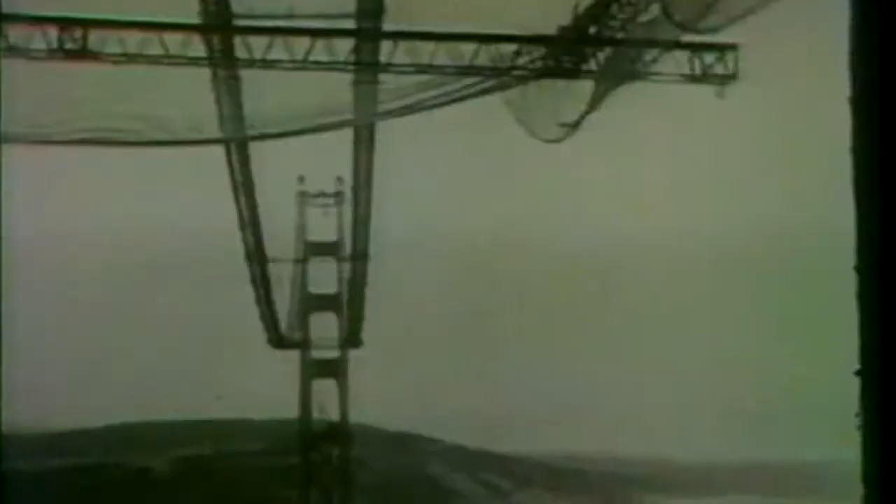He was carrying 30 pounds of very hard, sharp tools on his belt. He broke 4 vertebrae and spent 3 months in the hospital.

All my friends that came out said, you're going to be selling pencils now. You'll lose your nerve, you won't be able to do it anymore. I said, oh yes, I can. But it was 6 long years before Al Zampa was a bridge worker again.

By fall of 1936, residents of San Francisco are treated to the sight of a span which moves steadily closer to the day when the two halves will meet.

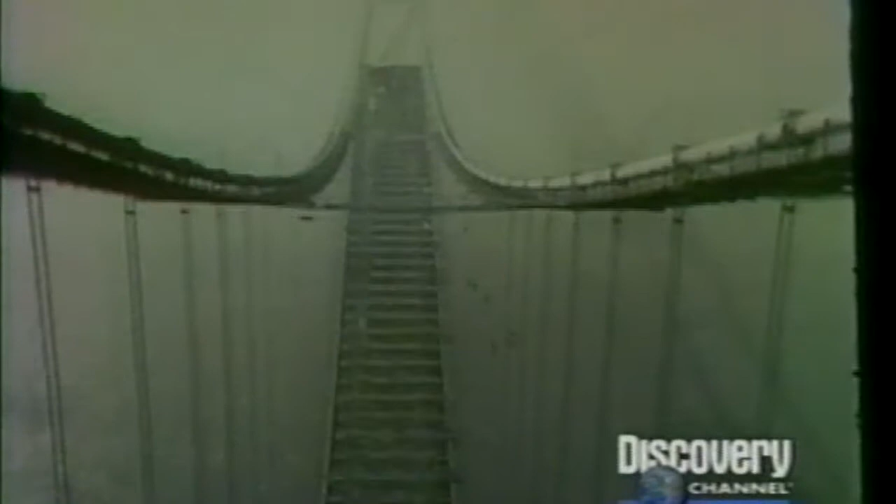The final and joining piece of steel in the middle of the Golden Gate is placed on the afternoon of November 18, 1936. The timing is no accident.

The engineering of the Golden Gate is so precise that after thousands of pieces of steel and thousands of tons of concrete have been placed, this last piece is designed to fit only after the sun has warmed the steel sufficiently to expand it. Only then will all the holes line up perfectly.

Although the big cables are in place before the roadway is hung, they now receive one more treatment.

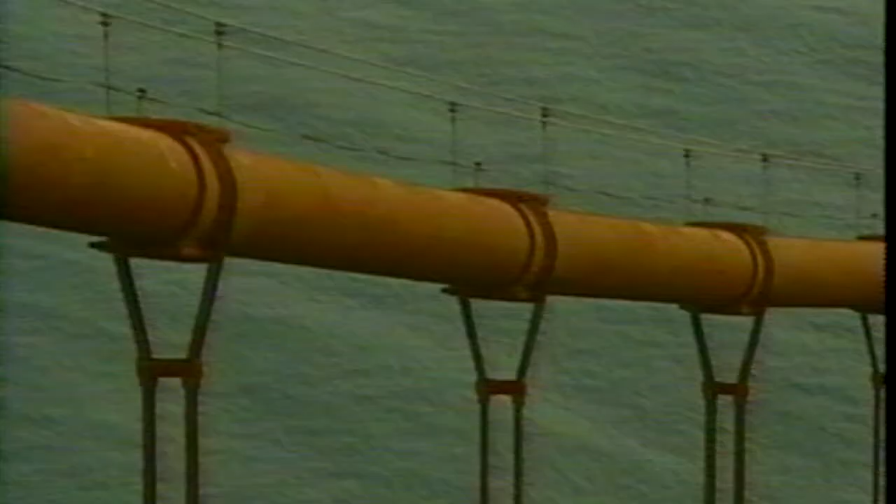To protect their thousands of wires from the elements and to help hold the wires in position, the cables are wrapped with steel wire. This requires a special machine mounted directly on the cable. When finished and painted, the cable looks so smooth that most people assume it is made of just one very long and large piece of curved metal.

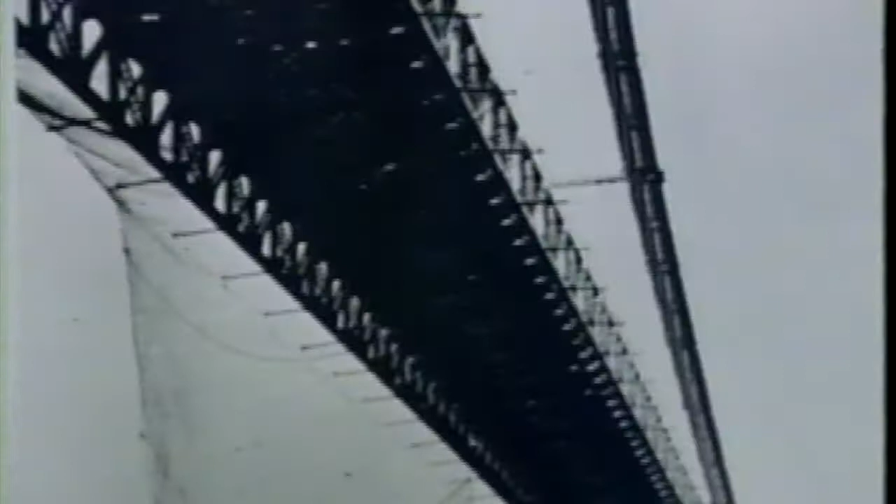The work is nearly done now, and the bridge is rushing to completion with its amazing safety record intact. And then, on February 17th of 1937, as if to prove every bridge demands its human toll, the luck runs out. Teams of men have been assigned to remove concrete forms from underneath the roadway. All at once, the support on one of the hanging platforms holding 12 men gives way. Briefly, the safety net holds, but the weight is too much. The noise of the popping net tells everyone it is too late.

The tide caught the net and started pulling it, pulled it taut for a while, almost as though it were a slide. One of the workers tried running up it, literally running back up it, but eventually it broke off and carried him in.

So we saw the whole thing, and we were throwing debris over for anybody that might still be alive and able to, and needed a little bit of help, grab onto a piece of wood or a piece of scaffolding or something like that.

When all the racket and everything, when that fell and tore down, I turned and looked, and over here about 10, 15 feet, or 20 feet from me, just on the other side, was two men, hold of it like that, the flanges of beams just hanging there with nothing under them.

Everything went down, and 10 of them they never found, you see. There was a 5-mile tide going out, and no, we couldn't see them at all. And I knew all of them. We were all working together.

While the Accident Commission holds its hearings, the men return warily to the job. And by April of 1937, as final work is finishing up, San Francisco starts rehearsing its celebrations. The Great Bridge is done, finished under budget and in record time. And now it is time to celebrate.

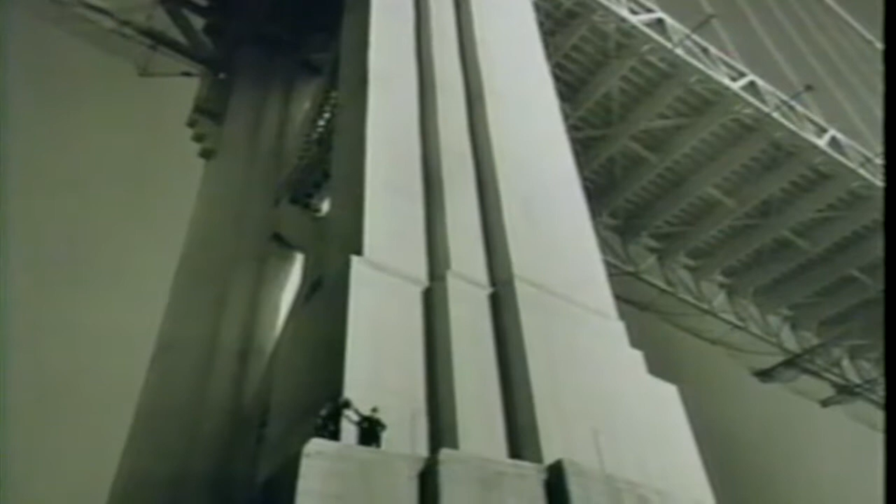And the hoopla takes a full week, Fiesta Week, when the celebrations take over San Francisco. It's like a second gold rush. The town is teeming with visitors, and there are parades and pageants everywhere. But the biggest events, of course, are the 2-day opening of the bridge itself.

And the first, on May 27th, is Pedestrian Day, a day when the walking public, and as it happens, the skipping, roller skating, running, kissing, and hugging public are invited to cross the bridge for the first time. And then, the next day, it is the turn for the automobiles the bridge has been built for. And in slow, steady progression, they begin a motorcade that will become nearly 40 million cars a year long.

It's been 60 years now since the Golden Gate Bridge first opened to the public, and the few changes it has required is proof of how well it was built. In 1954, after high winds had forced the bridge to close briefly, new stiffening girders were added underneath the roadway. In 1985, the entire concrete roadway was pulled up and replaced with a new one of steel.

Then, for the 50th anniversary, the bridge was opened to pedestrians only, to reenact the earlier Pedestrian Day. So many people crowded on that the bridge took on a new shape as the entire roadway flattened out. But there was no permanent damage.

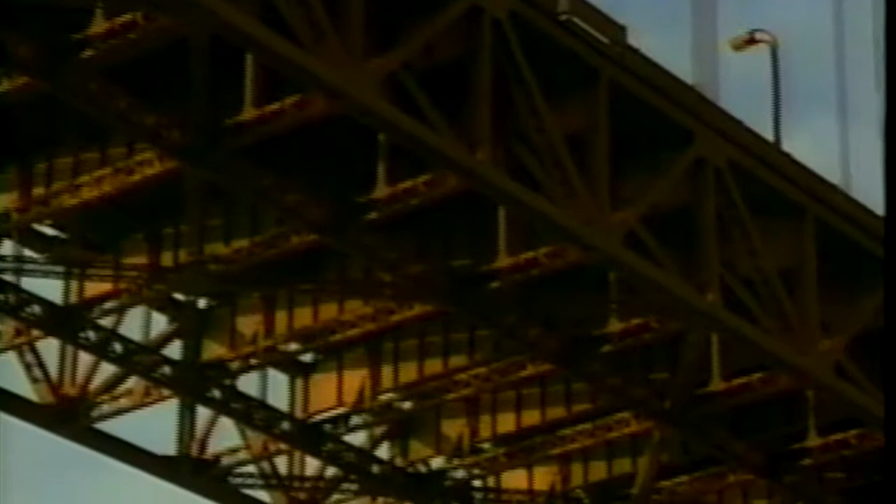And now a $175 million project will retrofit the bridge to make it more earthquake-proof. Strengthening steel and devices to isolate any movement will be added in various places on the bridge itself and on the approaches. In the short span of 60 years, the Golden Gate Bridge has become a symbol of American engineering and a monument to a time when the big projects were taken on and built right.

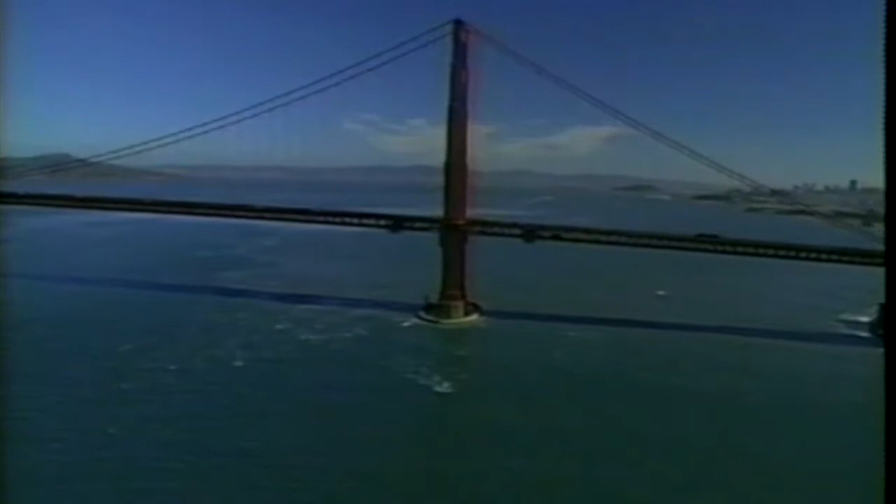I knew, deep down in my heart, I knew it was going to be a great bridge. I knew it. I think the bridge is something that nobody can ever take for granted, and I don't believe you can say that about many other things. Maybe even in things that couldn't have been done or shouldn't have been done before eventually become commonplace. A bridge is not commonplace, nor will it ever be.

Once, a bridge here seemed an impossibility. Now, it's impossible to think of San Francisco without it. And it's just as impossible to look at this extraordinary structure today and not sense the pride those who built it felt on its completion more than half a century ago.